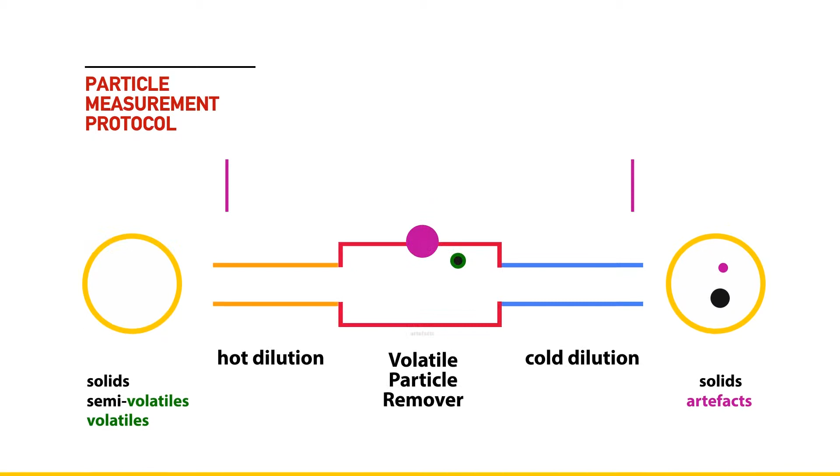Exhaust particle emissions are already regulated on a number basis, but only for particle size above 23 nanometers, employing a standard protocol with 2 dilution stages and removal of volatile particles. However, this protocol is inadequate for the measurement of exhaust nanoparticles below 23 nanometers, a size class which is encompassing an increasing fraction of vehicle emissions due to evolving engine technologies such as GDI.

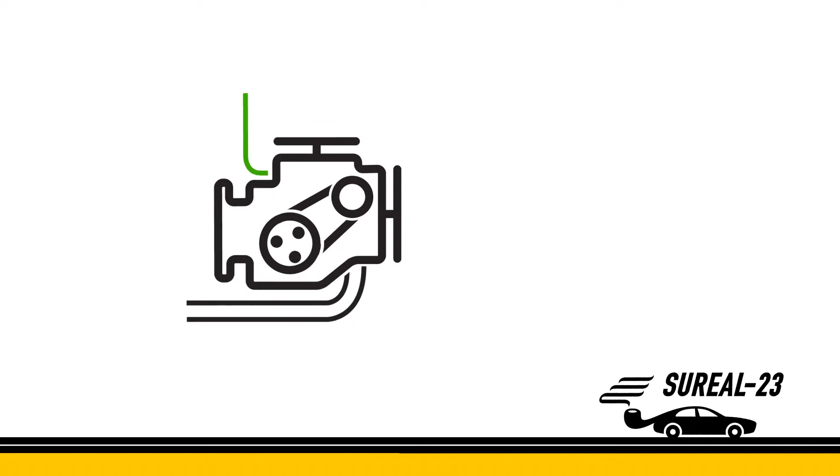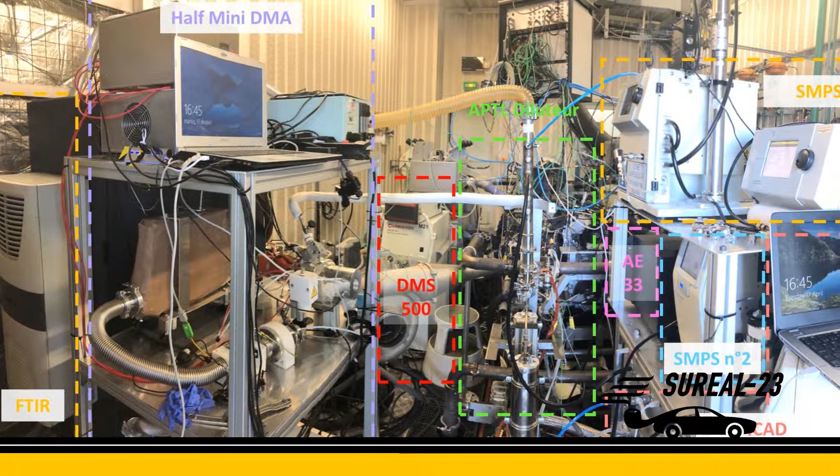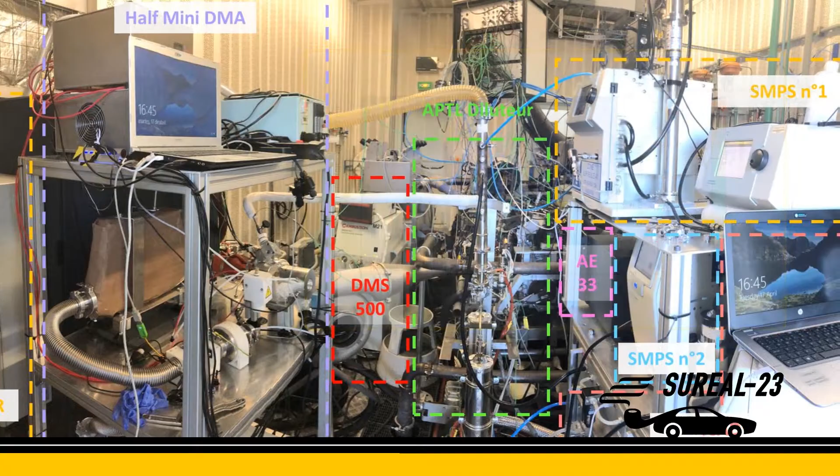SUREAL-23 aims to provide solutions in exhaust sampling and measurement instrumentation to overcome this problem. Diesel, gasoline direct and port fuel injection engines are tested for understanding the nature of sub-23 nanometer particles in terms of chemical composition and volatility, as well as their generation mechanism. The effect of different fuels, engine-related parameters, the exhaust aftertreatment and special engine operating conditions are studied both with in situ techniques developed within SUREAL-23 project as well as with ex situ techniques.

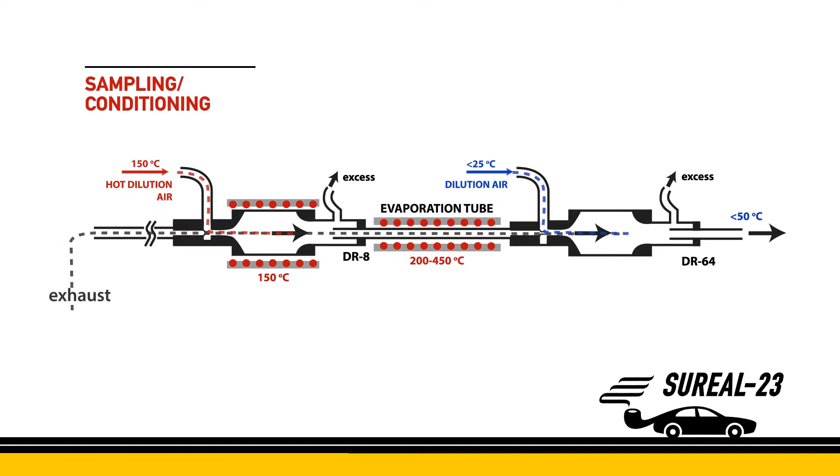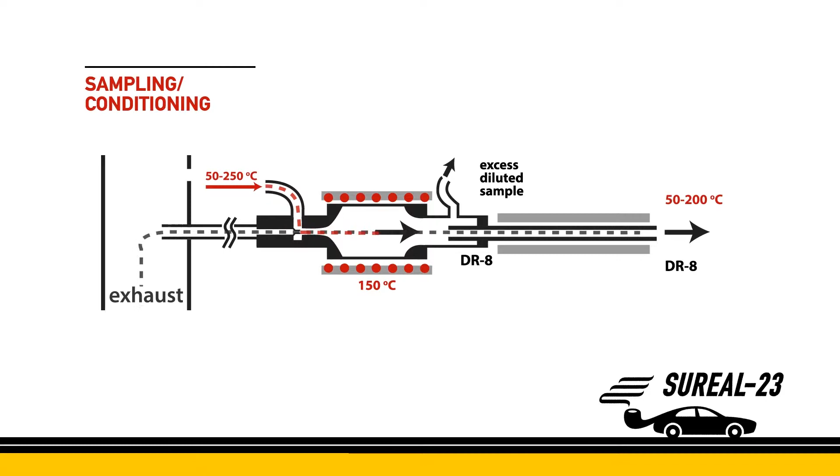Exhaust particle sampling and conditioning is of vital importance for robust and repeatable particle number measurements. The prototype sampling and conditioning particle system offers an adjustable and stable dilution ratio under transient engine conditions. A catalytic stripper efficiently removes heavy hydrocarbons and sulfur compounds, while high solid particle penetration efficiencies are achieved with cutoff size at 7.5 nanometers.

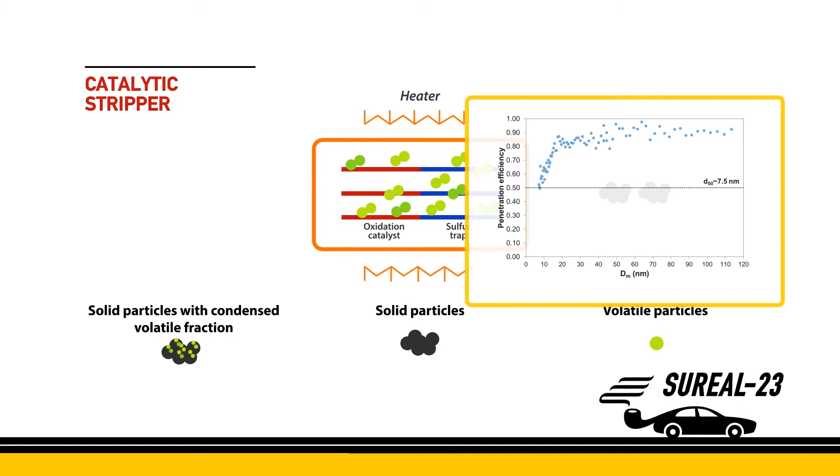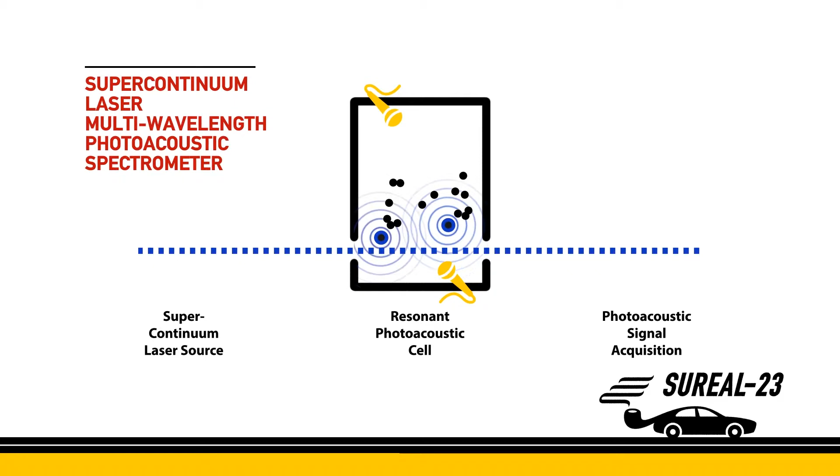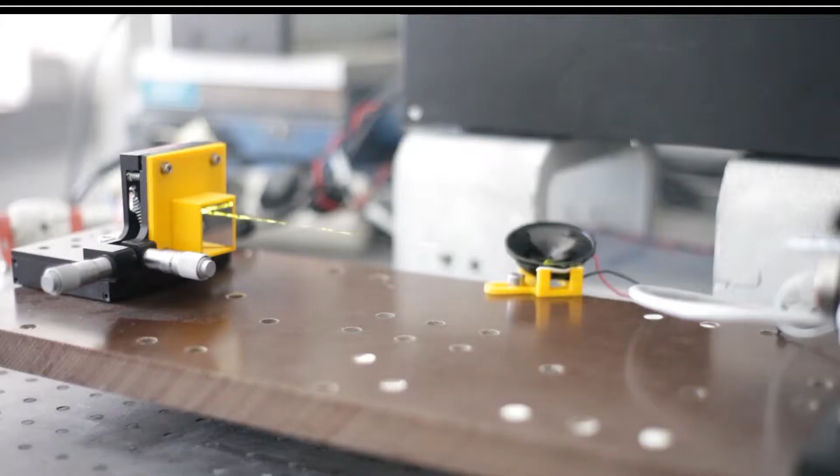The SCL-MPAS instrument exploits the advantages of super-continuum white light laser technology in order to probe the nature of engine exhaust nanoparticles, especially for the sub-23 nanometer size range. Particle composition is detected by the absorption of a pulsed laser beam and measurement of the resulting acoustic response while modulating the beam wavelength across the 400 to 850 nanometer spectrum.

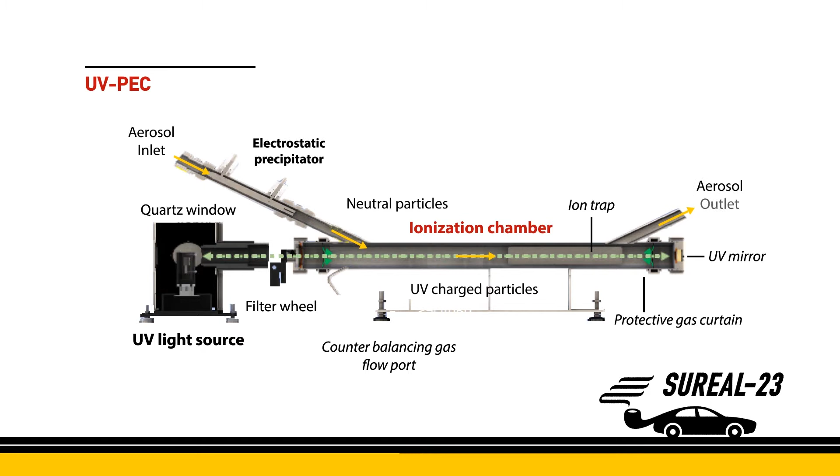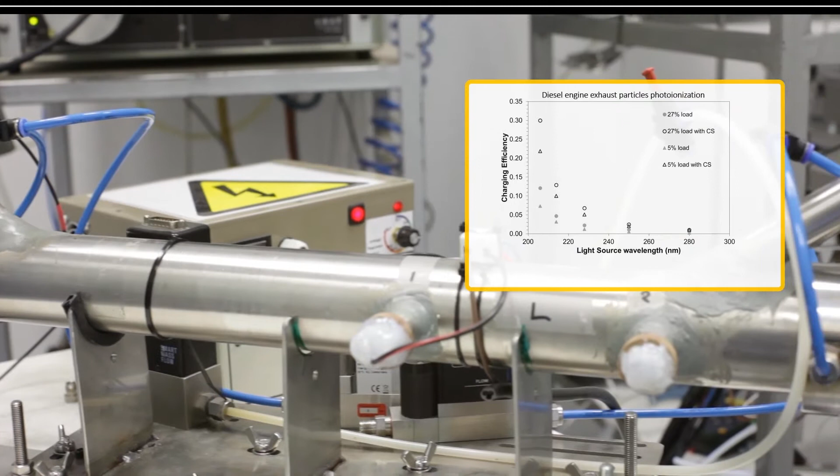UV photoelectric charger is based on the aerosol particles' property to emit photoelectrons when irradiated with UV light of energy above their photoelectric threshold. The fraction of aerosol particles charged at different light wavelengths is strongly material dependent and gives important information on the chemical fingerprint of condensed matter on the exhaust particles, and more specifically on the PAH content.

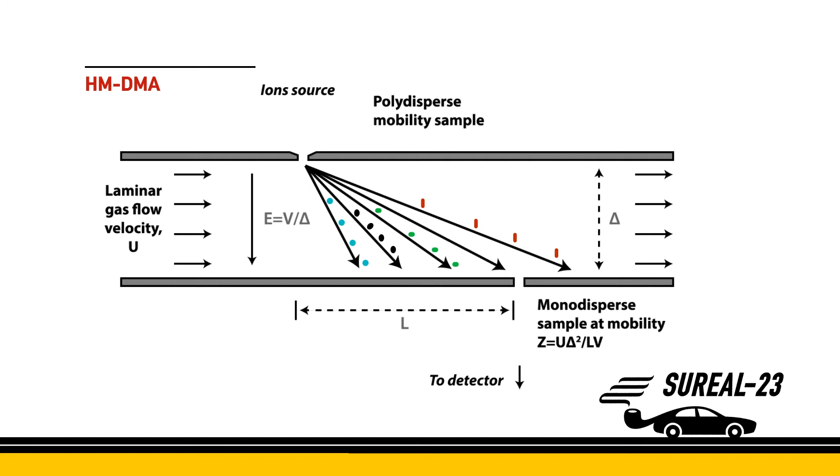The advanced half-mini DMA is a supercritical DMA, able to classify aerosol particles in the mobility size range from 5 to 30 nanometers, with high resolution and fast spectrum acquisition. Due to modifications developed within SUREAL-23, it can accommodate a hot sample flow up to 200 degrees Celsius, enabling the use of a less demanding and reliable sampling configuration for solid particle measurement.

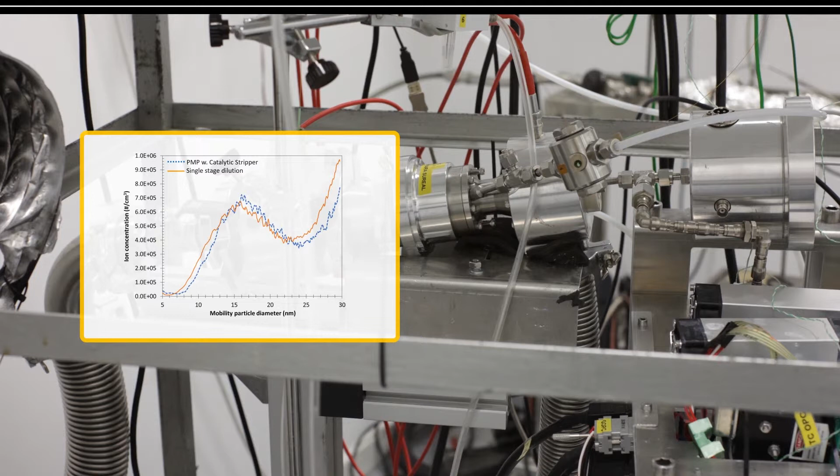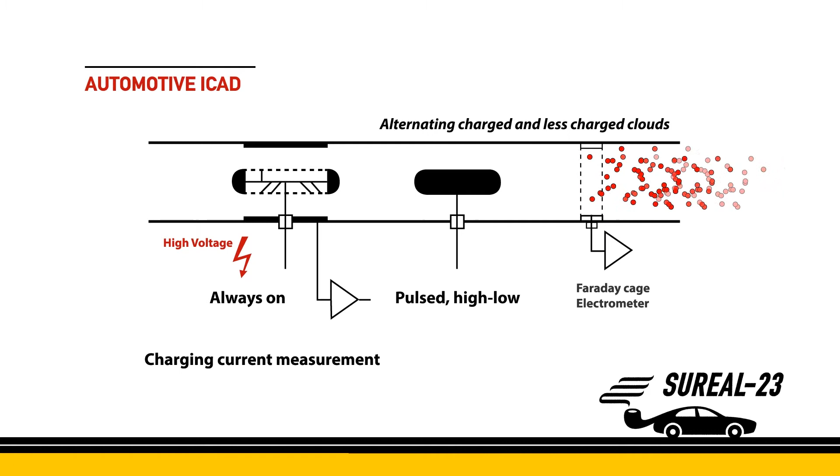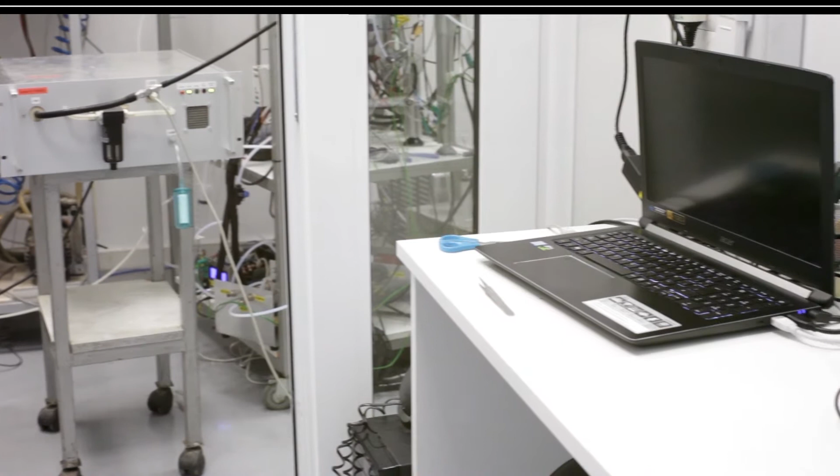The automotive ICAD is a small and robust instrument that measures the particle number concentration based on an electrical aerosol detection. Its compactness and low power consumption render it an ideal solution for real driving emission measurements. ICAD has a cutoff size at 10 nanometers, while it is able to measure at high temperatures that may arrive up to 150 degrees Celsius.

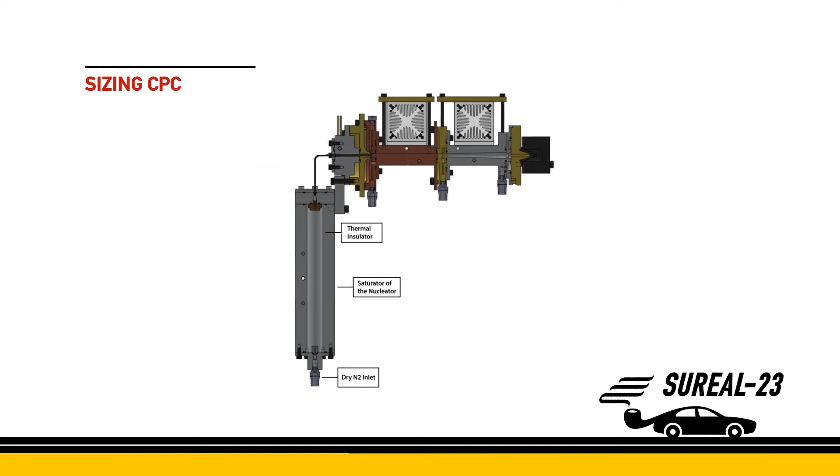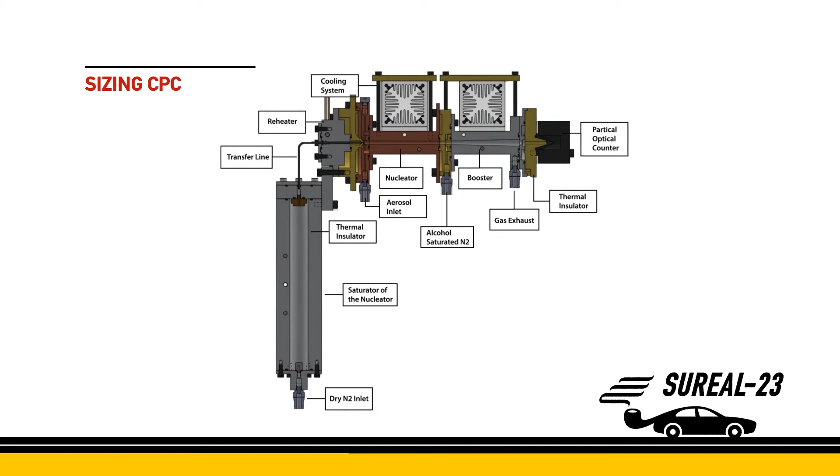The sizing CPC is an advanced CPC with the ability to provide also information about the size of the particles within an aerosol stream apart from their concentration, as traditional CPCs do. This is achieved by carefully controlling the value of saturation ratio that defines the size of particles that can be nucleated and grown up to an optically detected size.

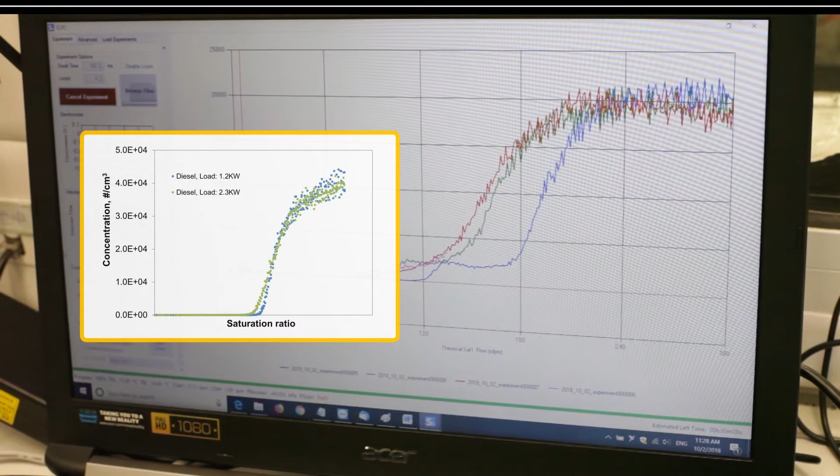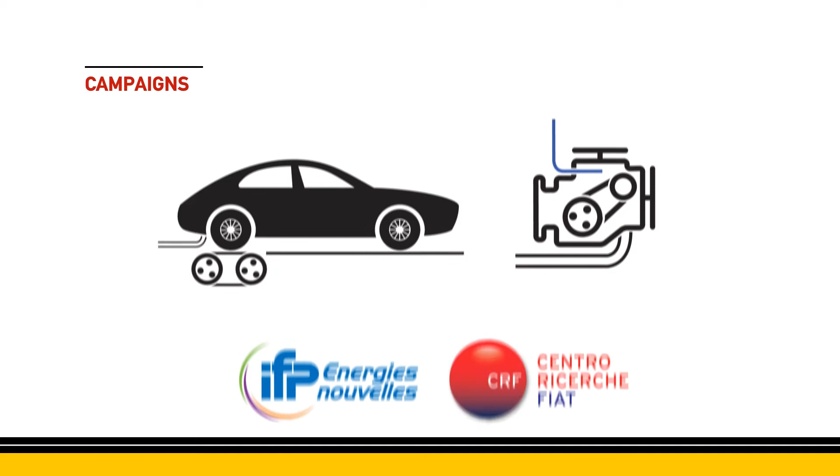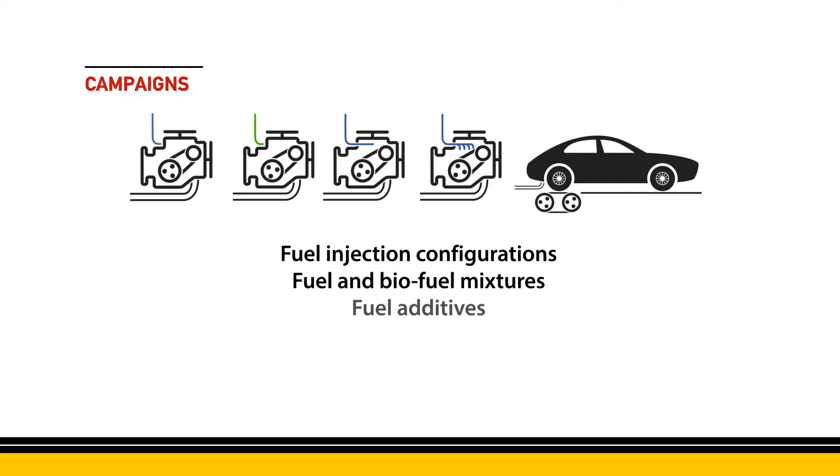Campaigns are performed at diesel engine, diesel and gasoline engine, GDI engine and roller test bench. The different effects evaluated include fuel injection configurations, fuel and biofuel mixtures, fuel additives, engine operating conditions, sampling conditions. The most promising technologies for onboard use will be developed in portable editions for PEMS.

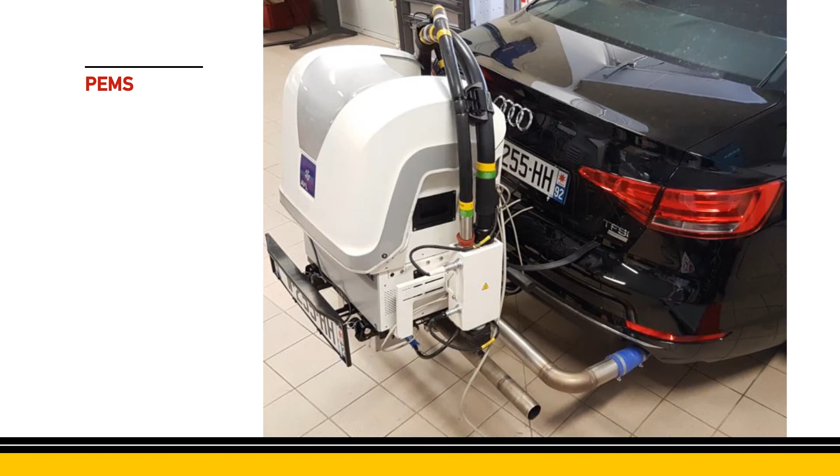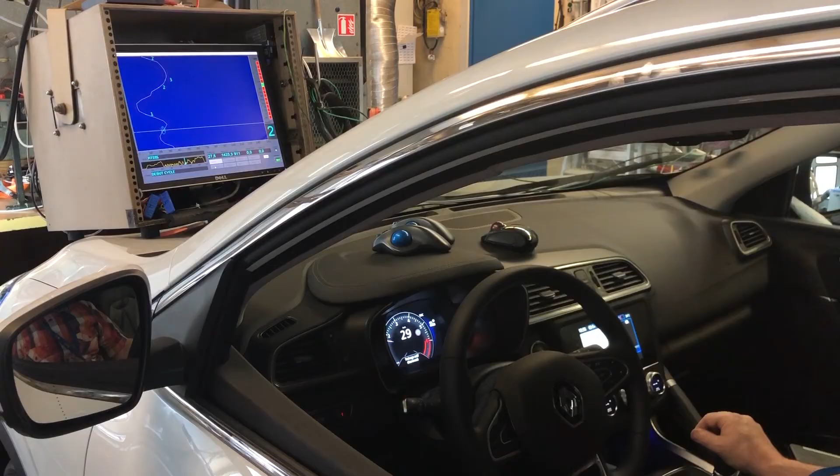PEMS development will be tested on chassis dynos and on the road. PEMS protocols for RDE will be defined. The data acquired through the project will be assessed in order to suggest quantifications for future sub-23 nanometer regulations.